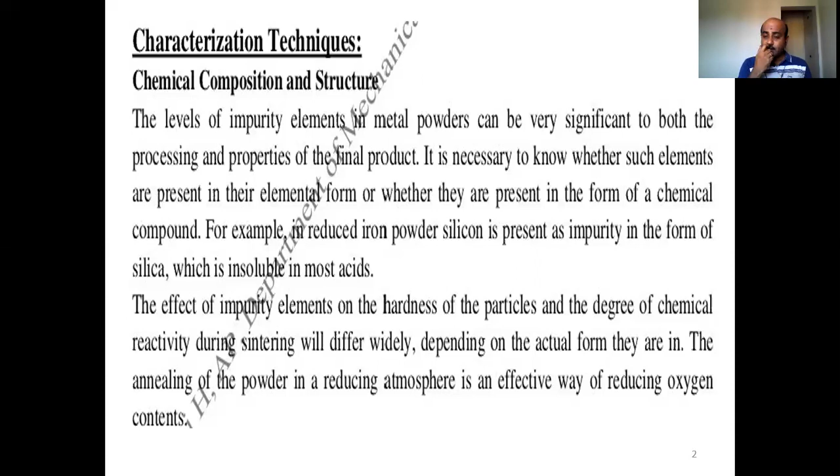Okay. And also, the effect of these impurity elements on the hardness of the particle and the degree of chemical reactivity during sintering will differ widely, depending upon the actual form they are in, whether they exist in elemental form or chemical compound form. Okay, annealing of the powder in a reducing atmosphere is an effective way of reducing the oxygen content. Since we discussed this in the last class, I will go a little bit faster here.

Yeah, and then the microstructure of crystalline powder has significant influence on the behavior of the powder during compaction and sintering. Whatever microstructure the powders have will influence the behavior of the powder during compaction and sintering. A fine grain size is always desirable, and the grain size can depend on the powder particle size and the powder production method. Rapidly cooled powder will naturally give rise to small particles and also small grains.

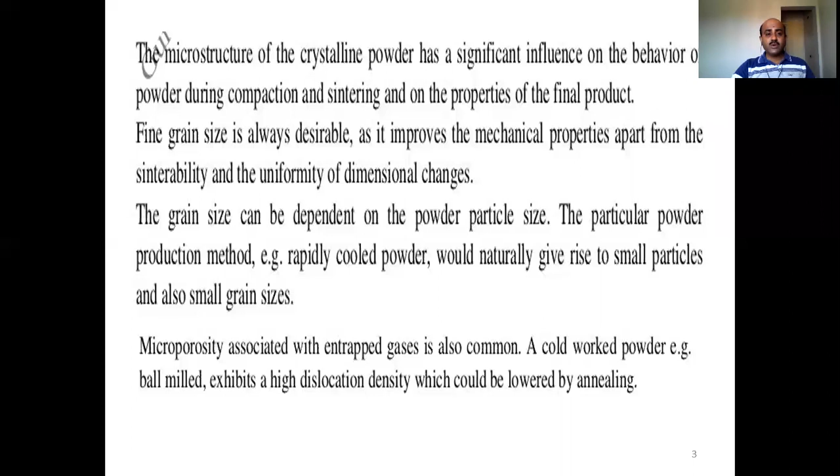And I think I ended the last class with the concept of particle size and shape. Quickly, I will refresh this. The shape of the powder is characterized by the dimensionality of the particle and its contour surface. Most powder particles are three-dimensional in nature and can be considered somewhat equiaxed. The most preferred shape of the powder is spherical. Okay, and porous particles differ from irregular ones because of the presence of porosity, which itself may be very irregular in both shape and size.

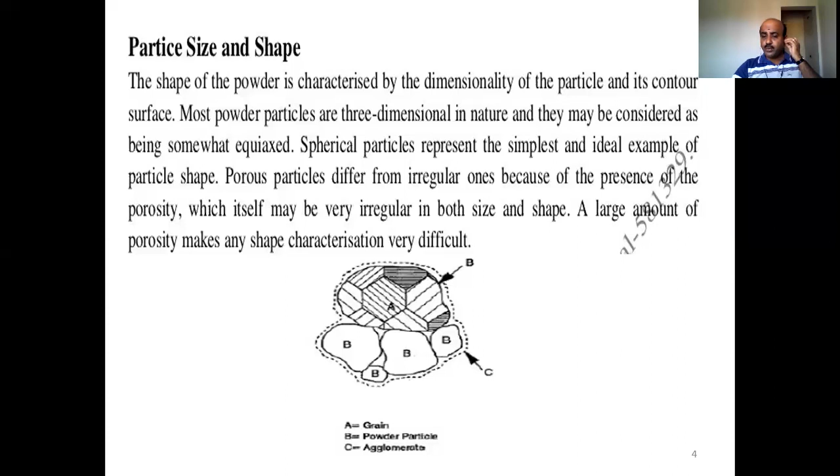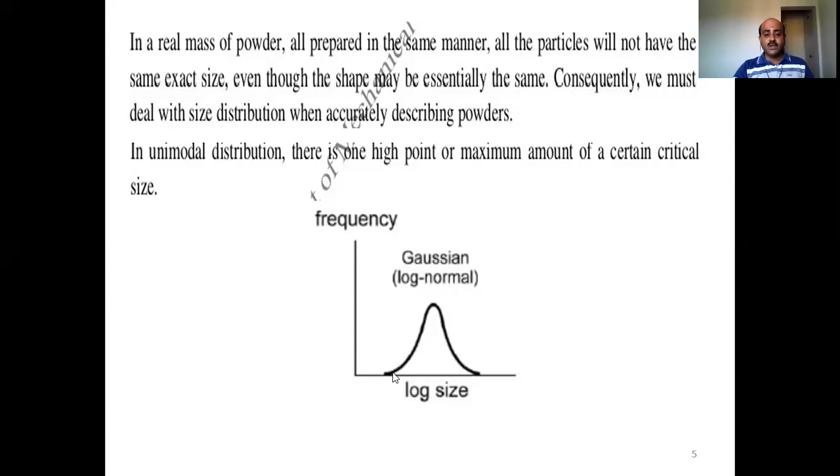Okay, so the size or shape of the powder depends upon the size distribution, which accurately describes the powders, right? Therefore, there are 3 or 4 different distributions we discussed in the last class. One is the unimodal distribution, where there is one high point, a maximum amount at a certain critical size. So there will be a Gaussian distribution like this.

And second, we have a polymodal distribution, where you have 2 or more narrow bands of particle sizes, and each band will have its own maximum. Okay. And in between these two bands, there will be no particles.

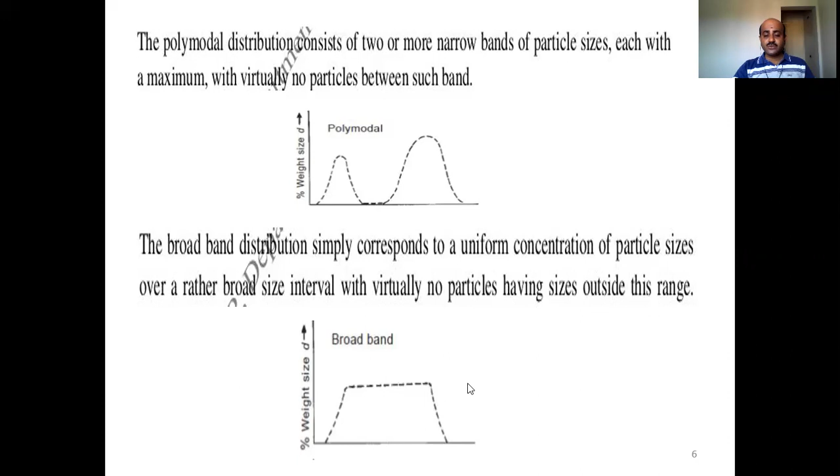Okay, that is the polymodal. And next, broad band distribution, which corresponds to the concentration of particle sizes over a rather broad size. So the maximum amount of the particle sizes will lie within this band, and there will be no particles having sizes outside the range. So there will be no particle size which lies outside the range, which is the broad band.

And finally, we have an irregular distribution which presents a continuous and finite variation of particle sizes within a relatively broad range. So this is what we were discussing in the last class. I think I just ended the last week's class with this concept. Okay, so to review all these things, I have taken a few minutes. So let us continue, right?

So in today's class, let us continue with the characterization of metal powders. In that respect, we're going to start with the concept of interparticle friction and flow characteristics. See, whenever we produce a powder for making powder metallurgy parts, the powders which are formed will definitely flow; once formed, there will be different techniques.

So definitely the powder particles will have interparticle friction. Interparticle friction will always be present within the powder itself, and it will affect the flow of the powder during production and even during the other processing techniques of powder metallurgy. So how this interparticle friction and the flow characteristics of the particles affect our powder metallurgy process, that is what we are going to discuss.

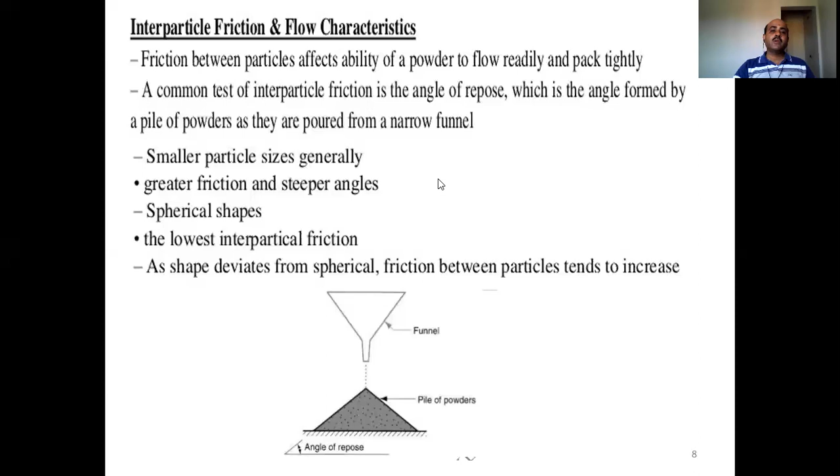Next comes compressibility. This is another important characteristic that needs to be understood with respect to metal powders. Compressibility is a measure of the extent to which a powder will compress or densify upon application of external pressure. So once you apply a pressure, how easily will the powders get densified? It is a measure of how much or how fast the powder will compress or densify on the application of external pressure.

Basically, compressibility is reported as a density in grams per centimeter cube, rounded to the nearest 0.01 grams per centimeter cube, at a specified compaction pressure, or as the pressure needed to reach the specified density.

Typically, a cylinder or a rectangular test piece is made by pressing powder in a die with the pressure applied simultaneously from top and bottom. Generally, in powder metallurgy, once the powders of different materials are formed, the next thing is you need to press it. We generally call this compaction. Compaction is the process of applying pressure externally so that the powders get compressed, bind, and form the final part.

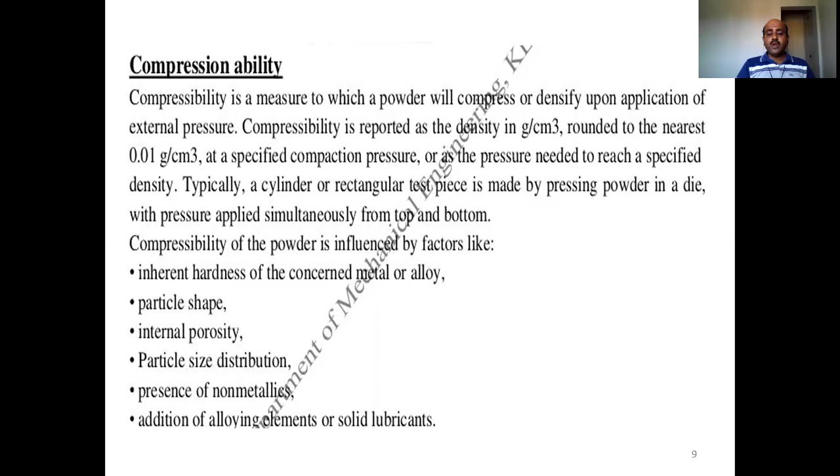The metal powders you have made will have their own inherent hardness; the metal itself has a certain hardness, whether it is a metal or alloy. The shape of the particle and the internal porosity are also very important, what percentage of porosity is required. Then the particle size distribution, whether it is polymodal or monomodal, or irregular, and the presence of non-metallics and addition of alloying elements or solid lubricants. These are all the factors that influence the compressibility of the powder.

Compressibility alternately is defined in terms of a densification parameter, and we have a mathematical expression for it. Generally, compressibility is expressed in terms of the densification parameter, which is taken as green density minus apparent density, divided by theoretical density minus apparent density. So this is the densification parameter.

Compressibility in general increases with increasing apparent density. A large amount of densification occurs at a relatively low compaction pressure. In the sense, if the densification parameter of the powder particles is higher, then when you start pressing the powder, the external pressure required will be relatively small. Therefore, we prefer metal powders with larger values of densification parameter so that during compaction you can apply a relatively smaller pressure.

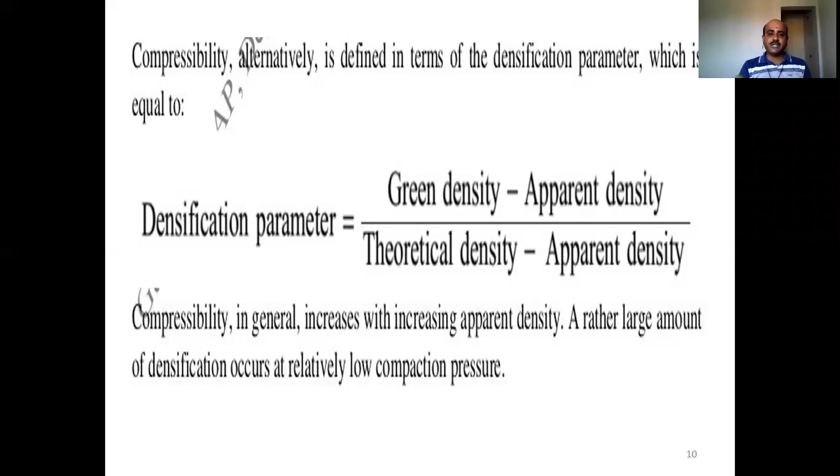Next comes the powder structure or the particle shape. We have discussed the size and the distribution of particle sizes, and now the structure, the particle shape. Powders can have different shapes, so what are those shapes and how can we get them? We're going to discuss it.

So these are the different powder structures we have. These structures are obtained with different methods and different metals, with examples like atomized copper, carbonyl iron, cast iron or stainless steel. So different shapes of metal powders can be obtained by different processes. We have some more things.

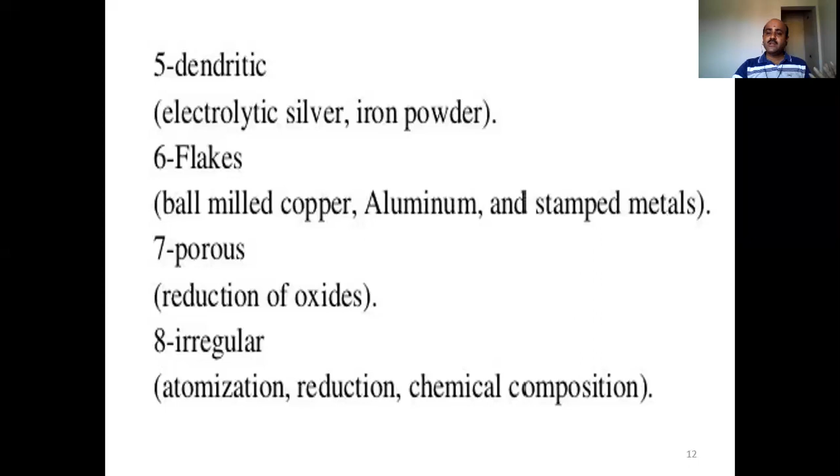Okay. So what type of final product are you manufacturing? Depending upon the requirements of the final product, depending upon the percentage of porosity required in the final product, we can decide which is the best method for us. Which method is going to produce the shape and the size of the particles that is more suited for obtaining the final product. So this is how we are going to decide.

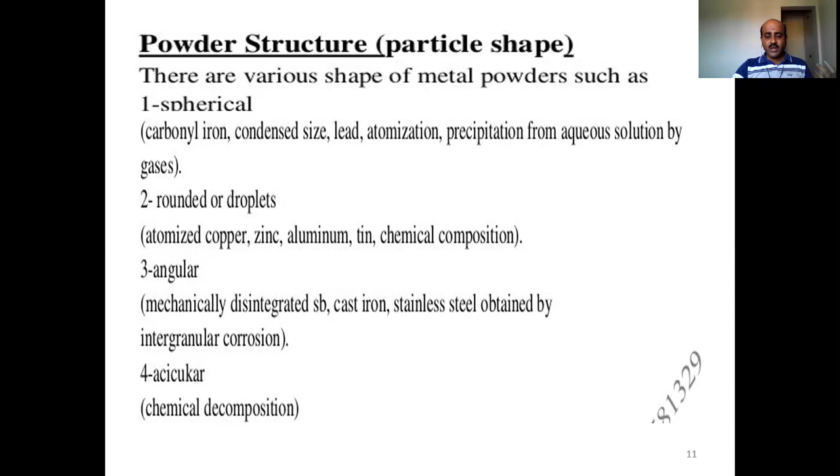So different methods are going to give different particle structures or particle shapes. So you have to decide which shape is required and which is the best suited particle shape or powder structure for our final product. So this is how we can get the different shapes from different processes. And finally, we have

fragmented. Particle shape has pronounced effect on the packing of powder and has influence on its compacting and sintering properties and the mechanical strength of the sintered product. Thus, irregularly shaped particles have reduced apparent density and flow rate, good pressing and sintering properties, while spherical particles have a maximum apparent density and flow rate, but reduced pressing properties and good sintering characteristics.

The shape of the particle will have more effect on the packing of powder. Packing of powder in the sense which is going to take place during compaction and sintering. So this particle shape will have an influence on its compacting and sintering properties and also the mechanical strength of the sintered product. So therefore, the irregularly shaped particles have reduced apparent density and flow rate.

So if the particle shape is irregular, then its apparent density will be reduced and also its flow rate will be reduced. But it will have very good pressing and sintering properties. While if the particle shape is spherical, it will have a maximum apparent density and flow rate, but its pressing properties will be reduced, with good sintering characteristics. So depending upon what type of particles we can have.

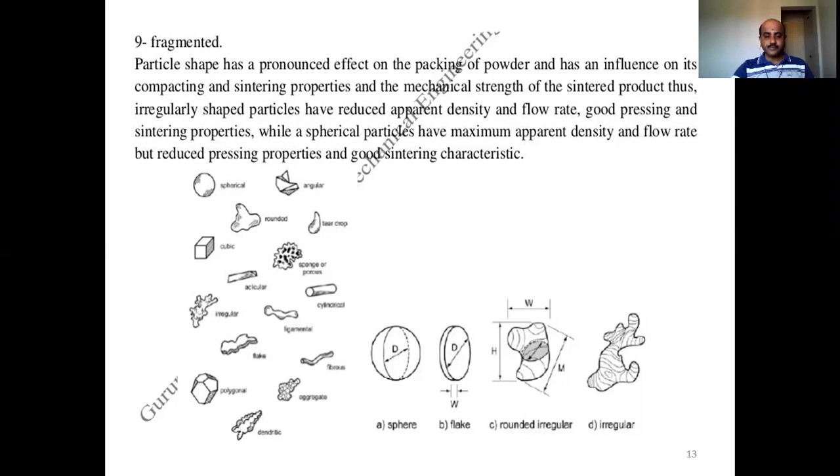So polygon shape, flake-like structure, irregular, acicular, cubic, rounded, angular, spherical. This is spongy or porous, cylindrical. Like that, different shapes of the particles we can see over here. Yeah. So once you understand, the shape, the compressibility, interparticle friction, and flow rate, these are all what we generally discuss under the characterization technique.

Next comes how we can control the microstructure in powder. The importance of microstructures. So before we go for this, what is the importance of microstructures? Because controlling the microstructure is a different case. But what is the importance of microstructure study? So first we should understand.

I think this kind of microstructure study you might have done in your metal testing laboratory in your course semester, where you know how to prepare a specimen for examining the different materials and alloys for microstructure study. So here also we will do the same thing. We will just have an extended discussion on the importance of microstructure. Okay. Microstructure determines the mechanical, physical, and chemical properties.

See, when we know the microstructure of that particular metal or alloy, whatever it might be, from the microstructure we can determine its mechanical, physical, and chemical properties. For example, the strength and hardness of the materials are determined by the number of phases and their grain sizes. The electrical and magnetic properties and also the chemical behavior are determined by the grain size and the defects present in the materials. This is a simple example. So how do we determine the material is harder and stronger?

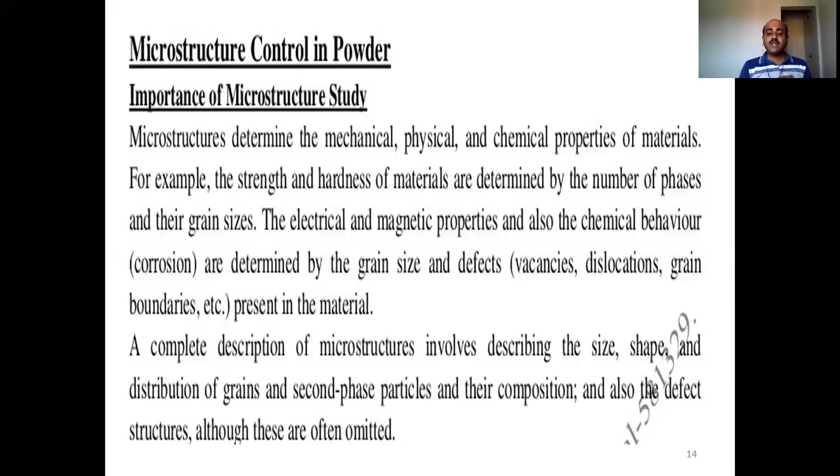When you want to have a complete description of microstructure, we need to describe the size, shape, and the distribution of grains, and the second phase particles and their composition, and also the defect structure, although these are often omitted. The defect structure generally we don't take, but when you say the complete description of microstructure, we just describe the size, shape, and distribution of grains.

So to impart different properties, generally we go for alloying or a deformation process or phase transformations. By using any of these methods, you can modify the microstructure of a body. When you alloy it, a new phase may appear in the microstructure. Or when you deform a material, the grains may get elongated in the direction of working. It is just like malleability or ductility, how you deform the material into different forms.

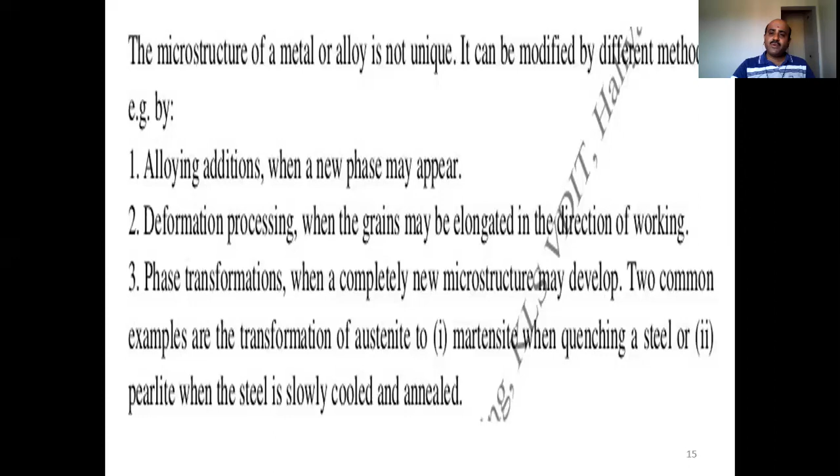So these are the simple examples of how you can modify the structures by a phase transformation, the different methods by which you can transform them. Next comes microstructures of powders by different techniques. We have one table, an overview of powder characterization techniques commonly used in additive manufacturing. In the next slide I will show the table.

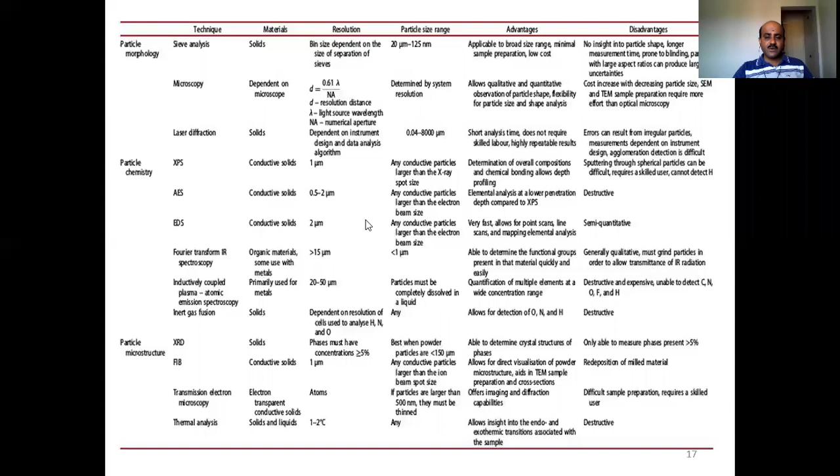The next comes particle shaping. Particle packing modification: how modifications can be done in particle packing. Generally, we describe the packing factor as the bulk density to the true density. Typical values for loose powders range from 0.5 to 0.7. Powders of various sizes give a higher packing factor. Packing can be increased by vibrating the powders, causing them to settle more tightly. Pressure applied during compaction greatly increases packing of powders through rearrangement and deformation of particles.

So here, when the metal powders are produced, the sizes of the particles will be distributed in different ways. The shape will be different. Okay. So the most important thing is the particles need to have the ability to get compacted and sintered so that we can obtain the final product. To get a final product, ultimately what we want is the packing factor: how densely the powder particles get packed.